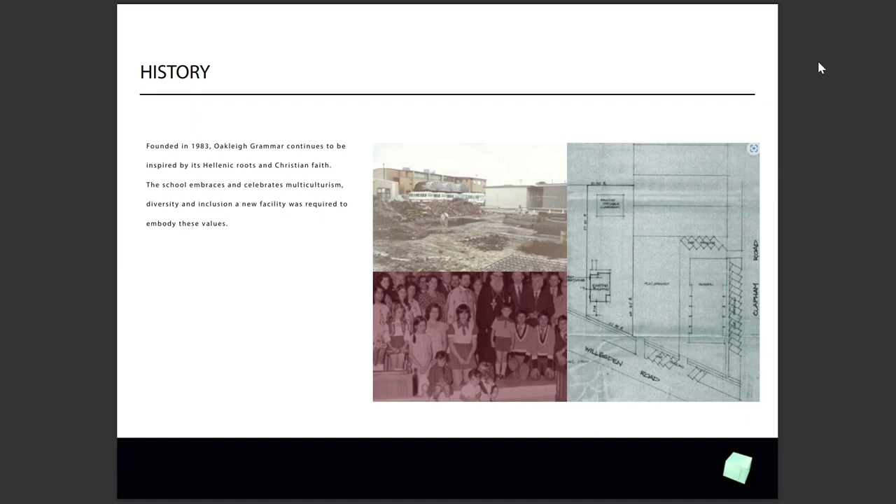Oakleigh Grammar Stage 1 was funded by the government and generous donations from the community as part of a master plan and growth program for the school. The building will be a legacy project of the long-serving and much-loved Principal Mark Robertson and his team. The Centre for Academic Excellence, as it was called, was established to serve future generations in the pursuit of academic excellence at a senior high school level.

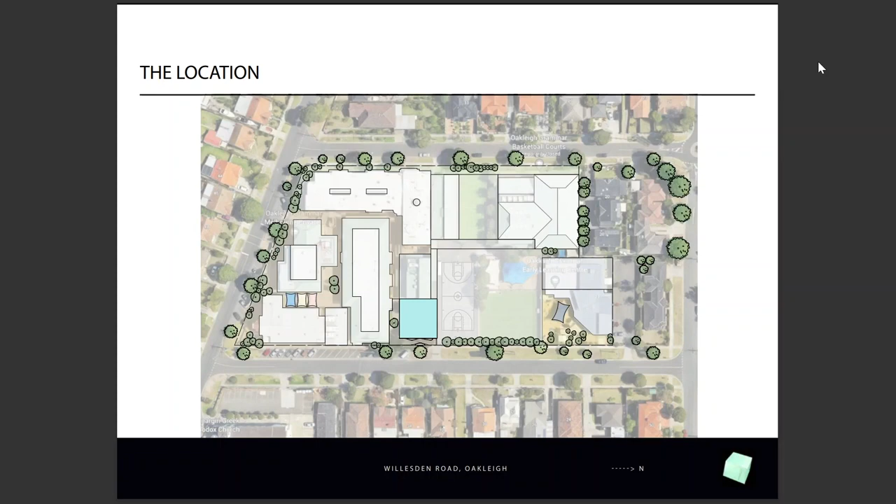Location. Located in the suburb of Oakleigh, near Chadstone, the epicentre of vibrancy and culture in the southeastern suburbs of Victoria, the school grounds cover an entire suburban block. We identified early on an opportunity to reclaim land by relocating a gas meter enclosure to free up this site. This enabled us to design and build a new two-storey school building connected to the rest of the facilities.

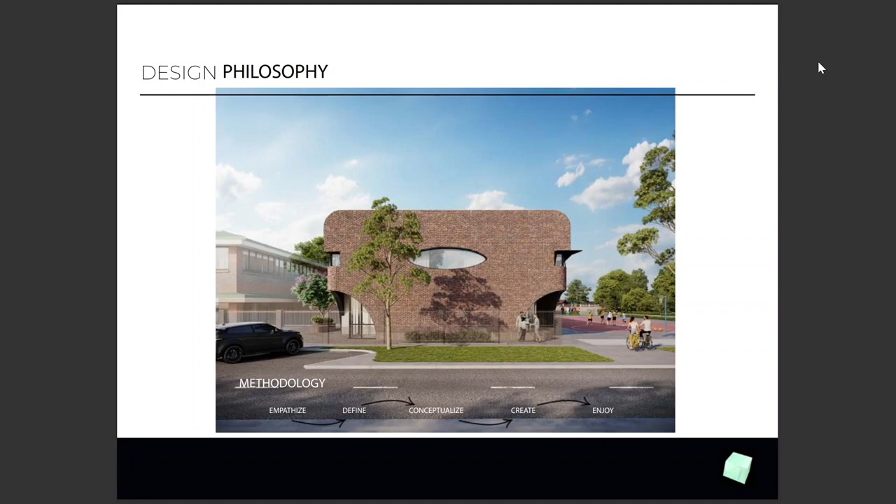The brief. We developed the brief together with and in collaboration with the school board, the school principals, the executive and users. The principal brief for the new building was to engage senior students in their final years of learning to create a sense of belonging, connection and wellness, which will ultimately result in higher levels of achievement, excellence and happiness.

Design philosophy. The philosophy and integral ideas that determined the spatial outcomes and built form was based on the notions of sustainability, environmental connection, community and belonging. The overarching theme was the desire to deliver a memorable and comfortable space created for the wellness and greater fulfilment for the teachers and students.

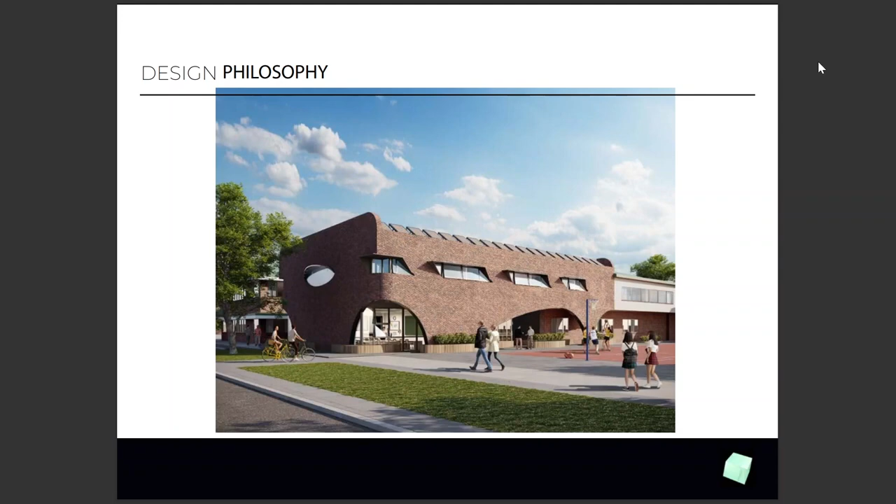This included requirements for flexible spaces, for stimulation, calmness, learning collaboration indoors and out. It also included the requirements to interconnect the various spaces of the school to the play area. The strong visual connections were created by linking interfaces with causeways between the new and old facilities, providing ample natural and artificial light, and horizontally and vertically integrating spaces.

Integrated concepts. The build outcome of the integrated concepts resulted in spatial and formal creations, specifically those of connectivity by way of causeways, memorable form by way of multi-dimensional parabolic arches, and an interplay with natural light and indoor and outdoor elements by way of physical links.

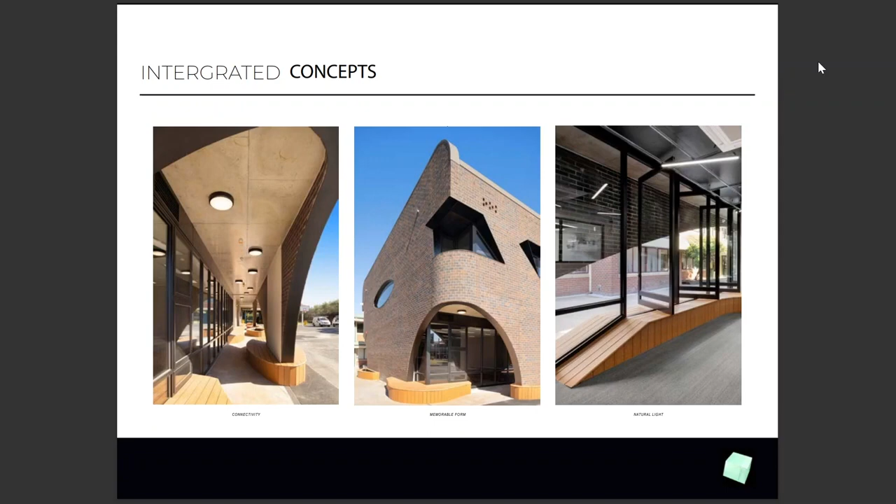Design spatial plan. The floor plan shows the interconnected nature of the spaces and their fluid relationship between the inside and out. The sustainability practice design measures that were adopted were the core strategy on the siting, urban design, energy efficiency, and a building that enhances and is responsive to the current and future needs of the environment.

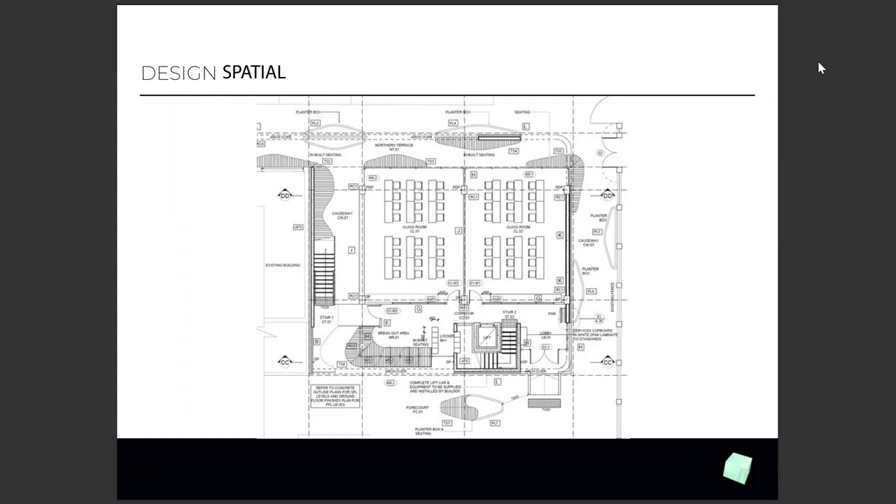A design example is the use of recycled existing material stone from the site, water harvesting for irrigation, landscaping pots and solar panels that were designed to act as a formal expression of the brick facade to the north.

Exterior. The integration of the concepts created two arcs at right angles together with a curved brickwork corner at the apex, giving the entrance an unusual arch look that speaks to the person entering as having arrived at a significant place of learning within the school campus.

The structure, primarily of double brick and concrete, required close collaboration with the design team, structural engineer and the builder. It was a challenge to construct large rolled parabolic curved steel load-bearing openings, one which gave great satisfaction when achieved.

A formal lobby and entrance were highlighted on the southeast side by peeling the brickwork on the corner to both sides. This open corner arrangement enhanced the visual of what appears to be suspended brick walls, and it was adopted to the northeast corner, thus giving symmetry to the street facade.

Lockers lobby. A formal lobby incorporating centre-hinged operable panels blurs the line between indoors and outdoors. A visual and spatial link between the spaces enables the user to physically traverse to what is essentially a glass wall when the panels are closed. Another great benefit of this is the natural ventilation that crosses through the whole ground floor.

Interior classroom. A feature of overhanging the first floor on the north side created a large and long covered walkway, acting also as a veranda with seats, sun shading and landscaping pots, facing the basketball court and other play areas. A view is established that links classroom activities to that of the outside activities.

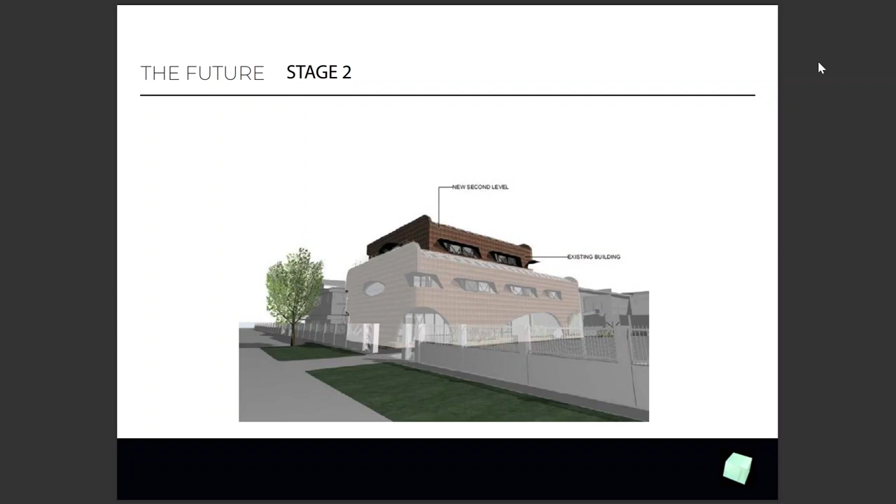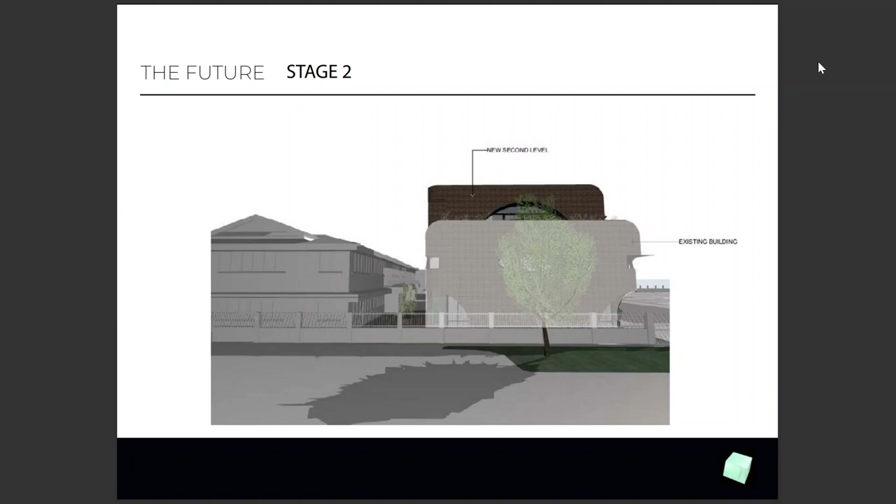The Centre for Academic Excellence is an example of the inspiring outcomes possible through the strong collaboration, enthusiasm and commitment of the design team and client group. Thank you very much.